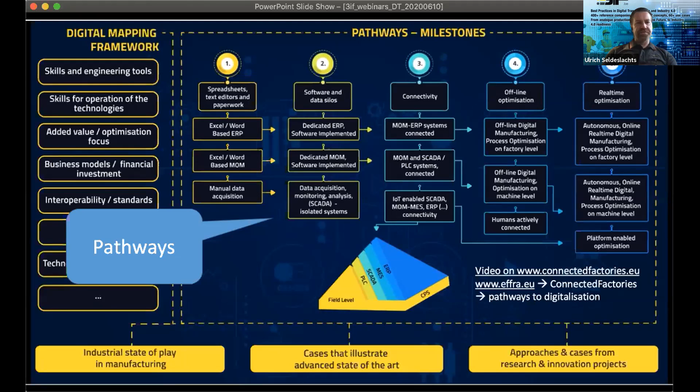We call those trajectories pathways, and in the next couple of slides I'll be giving you some headlines on what those pathways look like. We also operate what we call cross-cutting factors, things like cybersecurity, value propositions, business models, and so forth.

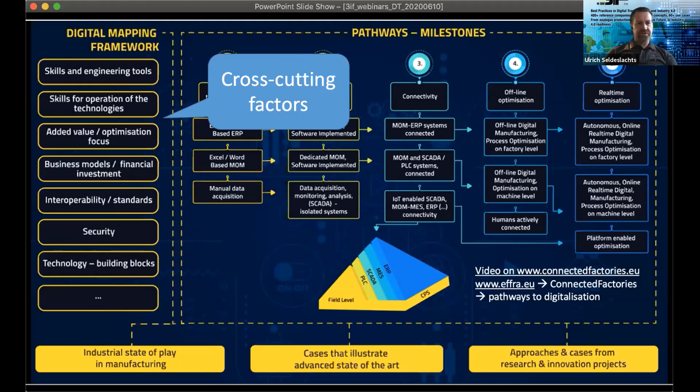One of those pathways is called collaborative product-service factories, where we try to understand the impact for production and manufacturing companies of digitizing or digital servitization of their products and technologies, and how they would need to integrate this, and where specifically. We can see the impact of digital platforms in the operations, but also in how they need to manage and support the products and services afterwards.

Another pathway is called autonomous smart factories. This is of high interest and importance to us, because there we see how the impact of robotics, for instance, and things like condition-based maintenance, one of today's topics, are impacting the factories, and how connectivity needs to drive those factories, but also the digital platforms behind it.

The more important component there is how to integrate all of these from the perspective of big data labs and big data lakes, and then working from big data with IoT sensors and connecting them to existing environments.

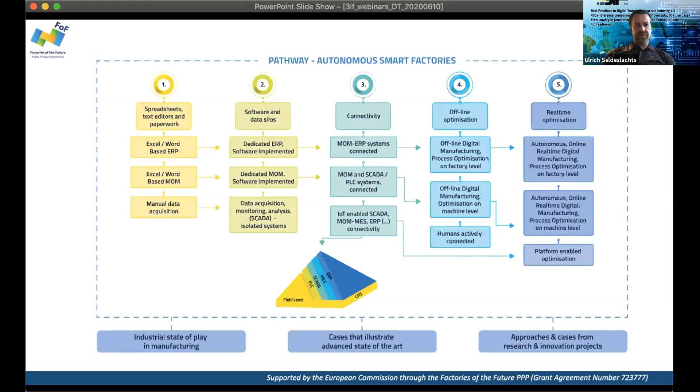From our field lab experience, we bring some of the IoT sensors and equipment that we have into the factories, and deploy them together with a number of partners. This results in expertise and experiences that we can further monetize towards supporting the companies. After half a day of installation, the companies can immediately see what the impact is for them and how they can further explore that installation.

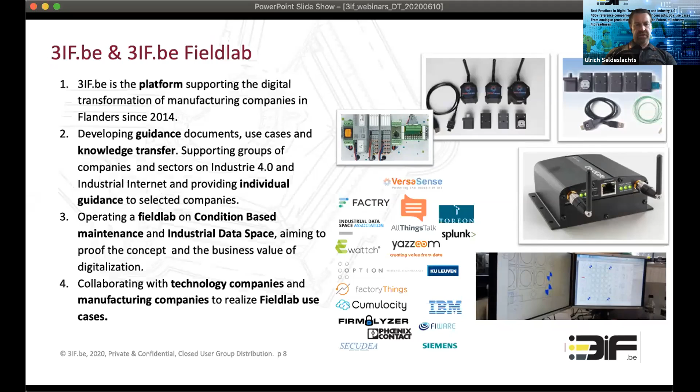The first half day is for free, and afterwards they can work with those providers to work out a specific commercial activity. With the Factory Sense platform, we've taken this to the next level, and developed a joint venture where we bring together the technologies and the installation work in a platform that is basically packaged as a product in a service.

And for less than 700 euros, there's a whole kit of those types of instruments that can be installed mainly with SMEs who are trying to understand what, in this case, digital factories can actually mean. So a couple of those components listed out here, but that's not to go further into detail here.

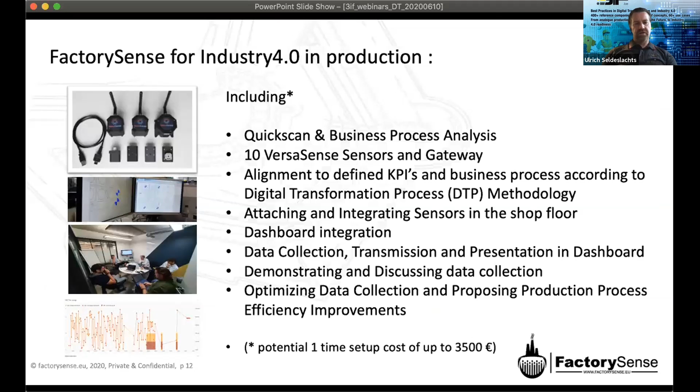Another project that we are working on is called Trinity. It's a European digital innovation hub, where we, as Flemish 3if, are one of the local digital innovation hubs. Within 3if, we support companies in their developments, and recently we have selected nearly 20 companies which will be supported with a fund of up to 300,000 euros to help them with their innovation activities. From 3if, we also work together with LSEC, and that's also the reason why you see the logo of LSEC somewhere on top and downstairs.

So yesterday, for instance, we had a webinar on how to identify your assets within your network, which is basically one of the critical components of cybersecurity. Also yesterday, we had a discussion about how to do network detection and response, also very important for industrial cybersecurity.

Today, we'll be focusing more on the activities of World-Class Maintenance. Thanks to our partner from the Netherlands, in this case, thanks to Paul. Good morning, Paul. Hope you're doing well.

We need to unmute you somehow. I think that's my fault because I think I put you on. Yeah. Yes. Good morning, Ulrich. Good morning. Good morning. How are you doing today? Yes, I'm fine, thank you.

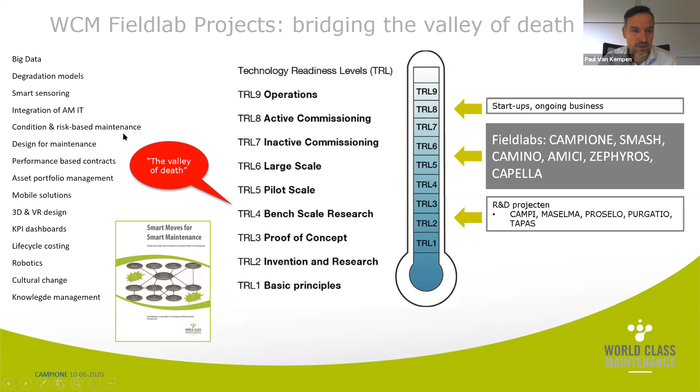But the starting point for a lot of field lab initiatives is this condition-based maintenance, and that was also the trigger for Campione. Our initial goal towards zero downtime, or the other way around, is 100% predictive maintenance.

Of course you can argue whether 100% predictive maintenance is really something you want to achieve, and for some part I agree, because in some cases even corrective maintenance could be a fine solution. But on the other hand, we see that achieving 100% predictive maintenance is getting really achievable and cheaper every day, because of all these developments in Industry 4.0.

We use this rather radical goal for Campione on purpose, because it triggers a lot of companies. If you have this radical goal, a lot of companies realize that they cannot achieve this alone, that they have to cooperate, and that's why they want to join open innovation initiatives like the Campione project.

Campione sounds very nice, it's also used in sport terms quite a lot, but it's actually an abbreviation, standing for Condition-based Maintenance for the Process Industry Open Network Environment. So that says a lot - it's about condition-based maintenance, or 100% predictive maintenance, focusing on the process industry initially, and it's again an open innovation project.

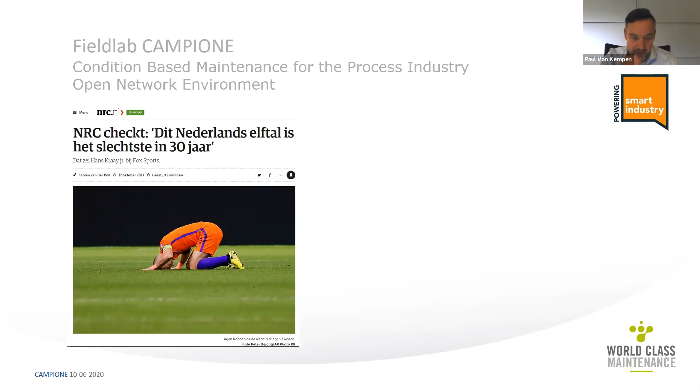But something happened in 2017, and when I asked the same question, suddenly people were very enthusiastic. That had a specific reason, because our ladies team became European champion. Later on we had some other developments, and then suddenly the whole opinion changed - suddenly we had a very good team. What this shows is that depending on the type of data you take and the filtering you apply, you come to some conclusions.

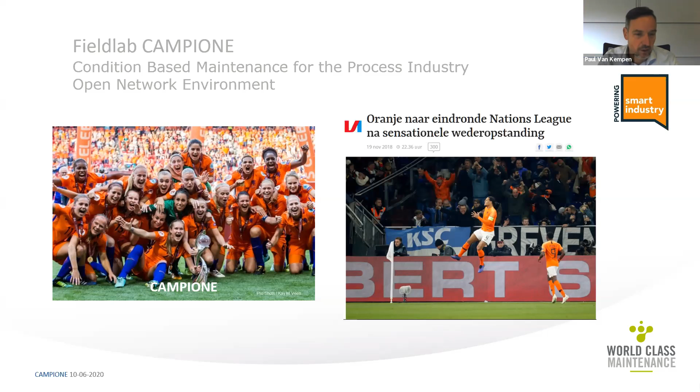That test facility was opened somewhat more than a year later, in the Gate 2 building in Rijen, which is across from the airbase Gilze-Rijen in the south of the Netherlands. For that opening, the Minister of Economic Affairs of the province of Brabant at the time, Bert Pauli, was there again, along with Ineke Dezentjé and someone from the municipality of Gilze-Rijen. Together we opened the field lab there. The Campione and other field labs are all about smart maintenance.

As I said, we typically connect rather radical goals to these field labs. For Campione, it's 100% predictive maintenance. For others, like in the offshore wind sector, we also have one like zero on-site maintenance. So a lot of attention for robotics, for example.

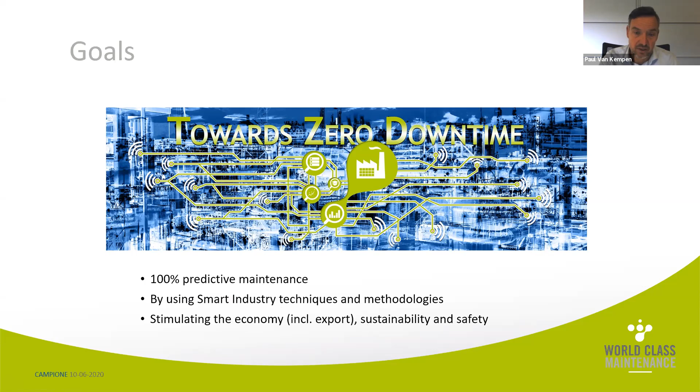This is again the radical goal I explained. So the other way around is 100% predictive maintenance. And of course, what we would like to do there is use all types of smart industry techniques and methodology, get knowledge and experience about it, and disseminate that through our members. Of course, it was initiated by the fact that we wanted to stimulate the economy. But once you do it right, working on predictive maintenance, you also work on sustainability and safety. So that's a win-win-win situation, I would say.

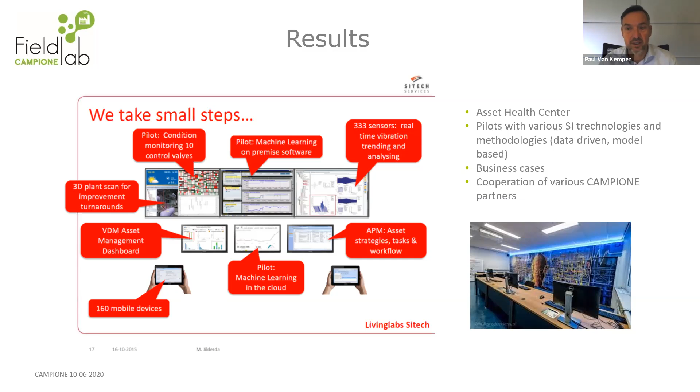And with these business cases, the support from the whole organization grew for this Campione initiative. And then the pilots grew, scaled up, etc. And now they are very successful partners. I think it even had an effect on their own corporate identity.

As you see here, there's a more recent sheet with a new logo, the new Asset Health Center they have set up. And they are now also experimenting with much more smart industry type innovations, from 3D printing, or LED as a service, smart sensors, etc. So a rather big scope of smart maintenance related innovations are now tested and implemented at the same time at the Chemelot site.

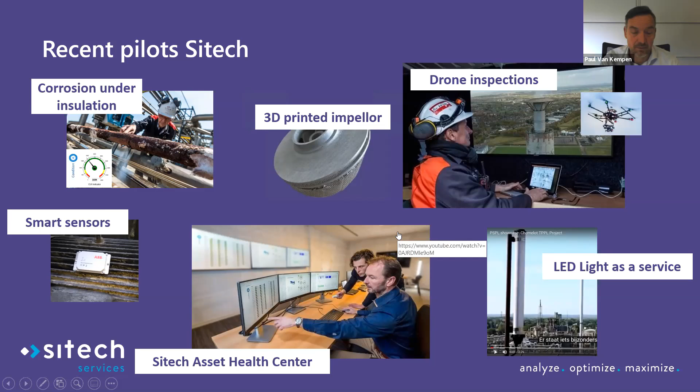Another one which I also like to show is a cooperation with Fujifilm, of course a big Japanese company, but with a nice plant in Tilburg, the Netherlands, not too far from Rijen, where we are with our central field lab, and IMS, a startup company on digitized maintenance. The nice message here, which I think goes for many companies, is that you can really start with smart maintenance by looking at your existing data.

In the case of Fujifilm, we looked at a production plant for offset printing plates. It starts with a big roll of aluminium plates in a factory that goes over 1600 rollers like these. Then it gets all kinds of mechanical and chemical processing, and at the end it's cut and you have an offset plate.

These rollers have a metal roller with some rubber on it, and that degenerates, resulting in poor quality plates. For Fuji in the past, the only thing to do was stop the production line, visually inspect these rollers, and replace them if necessary. It was a very costly operation, certainly because production had to be stopped for that.

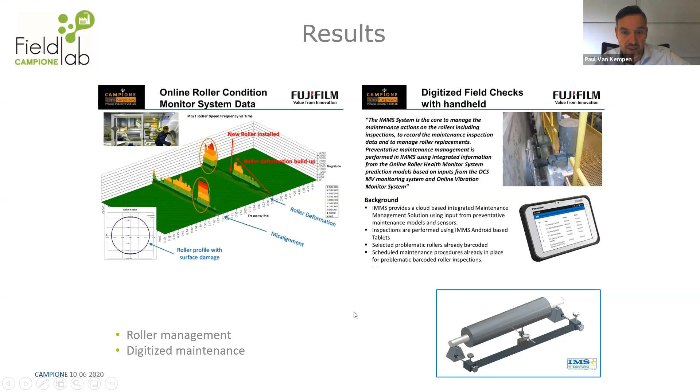I would also like to stress the relevance of involving schools. I already mentioned the human capital line, so it's very important that besides all these innovations, we also have people who can work with them. Therefore we included schools in our project quite soon: ROC Tilburg for intermediate-level education, and Avans Hogeschool, a University of Applied Sciences. They picked up the whole project quite well.

Actually, they co-designed and co-produced the whole test facility in Rijen, and they are facilitating a lot of experiments. One example is that they would like to make a connection with the process automation of ABB, also one of our members, and connect that to a virtual world.

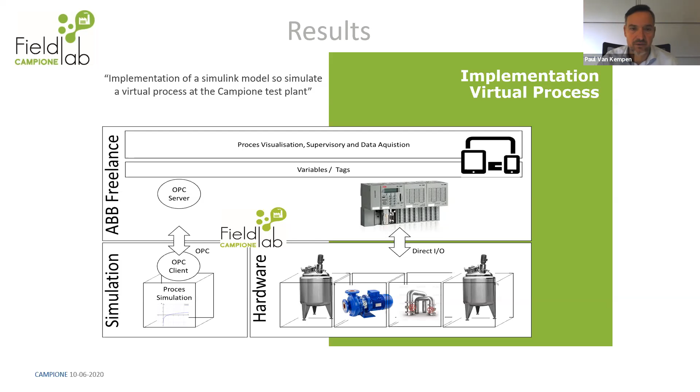In the virtual world we can do unsafe experiments with chemicals, high temperatures and pressures, and then connect it back again to our physical test plant, where of course we don't want heavy chemicals, high pressures and temperatures, because that results in unsafe conditions which prevent people from really doing a lot of experiments. But the schools have been very important for us.

As already mentioned, we have a specific work package on virtual and augmented reality. In fact, we have what's called a mixed reality lab, the DAF lab, because we also got a fund from the DAF Foundation at Tilburg University. Professor Max Louwerse is leading their research, and in the end they want to advise companies on what works and what doesn't work in situations involving virtual and augmented reality training or field support. They do that with research up to monitoring the brain activities of people, so it's quite detailed and high level, and they have very interesting facilities at the university.

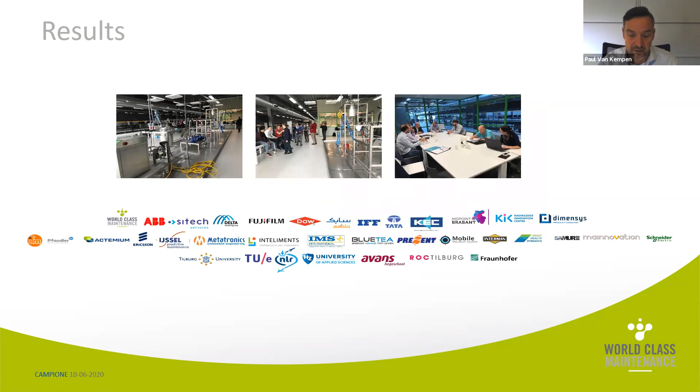Of course, I could show you hundreds of other sheets about the other partners, but in general, a lot of companies did many experiments either at the central field lab, typically supported by Avans Hogeschool and ROC Tilburg, or in the living labs, the pilot environments in industry.

Yeah, about lessons learned and follow-up, because I think Ulrich, I probably have around 5 minutes left, something like that. Ah, okay.

But what we have in Campione, and I think that's relevant for everyone, is that you have to have a mix of both these mathematicians, the experts in big data, but also people that know about the processes and the technologies. And if you mix that, I think you can come to a nice, successful outcome.

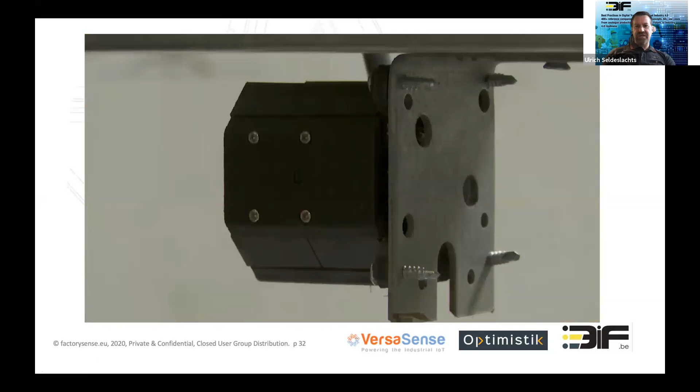So this gives a bit of an impression that we are not too far away from each other, but we can still learn quite a lot from each other. With this, thank you very much for your early morning participation, and I'm very much looking forward to seeing you again, not too far away from here, face to face.